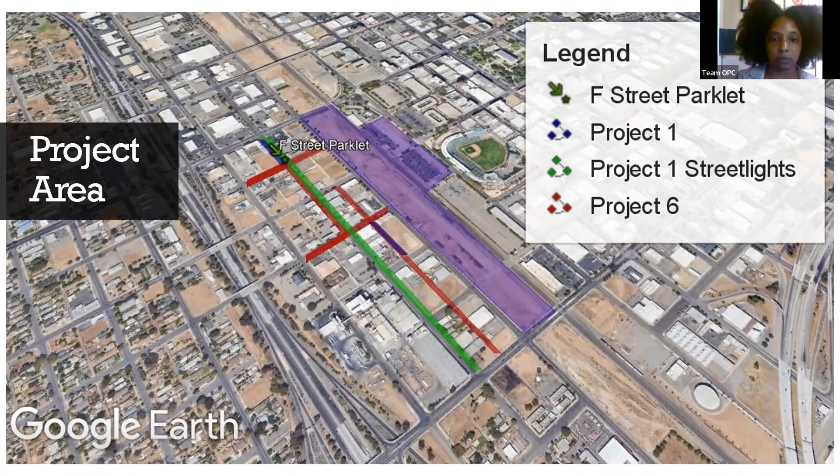This is, of course, the area at Ventura Street, as well as the corner of Ventura Street and F Street, very close to where Full Circle Brewery is. So the project will start here, essentially going along all of F Street toward Fresno Street.

This part of the project will be focused on street lighting and improved street lighting along all of F Street. There will also be some improvements along China Alley between Kern Street and Inyo at this point as well, to green up the area as well as improve safety and street lighting.

Then the project will move forward into Mariposa, corner of Mariposa and F Street, where we'll be installing a parklet. Followed by that, we'll be providing additional tree planting on that final block of F Street toward Fresno Street, between Mariposa and Fresno Street.

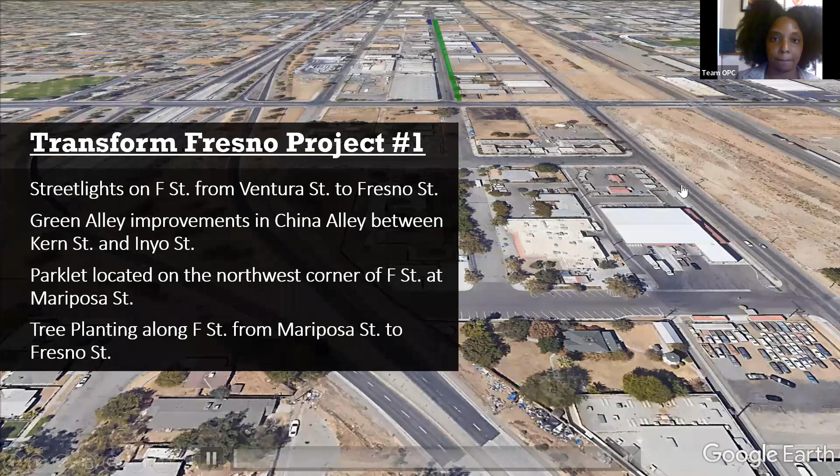The Project 6 area goes along all of China Alley that wasn't already part of Project 1, and will provide greening improvements along here as well. Then there will be additional planting and streetlight improvements and sidewalk improvements along F Street, onto Kern Street, as well as onto Mariposa.

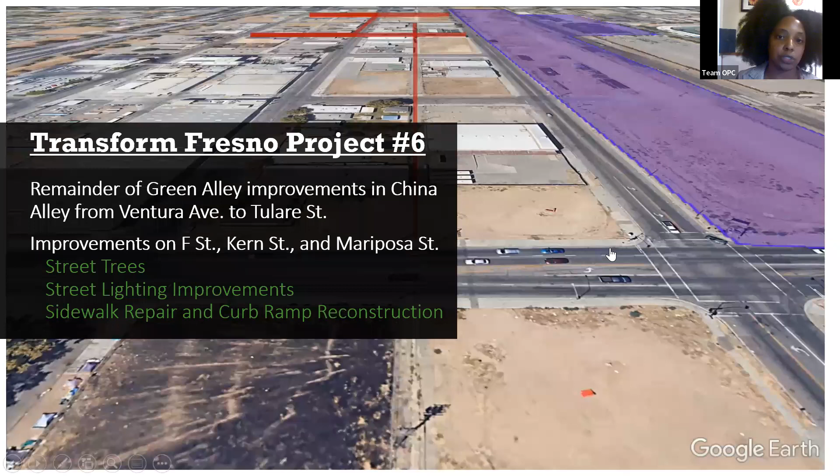Now, to go into more detail about the status of the design right now, I'm going to turn it over to Todd Wood at DeWalt. Todd?

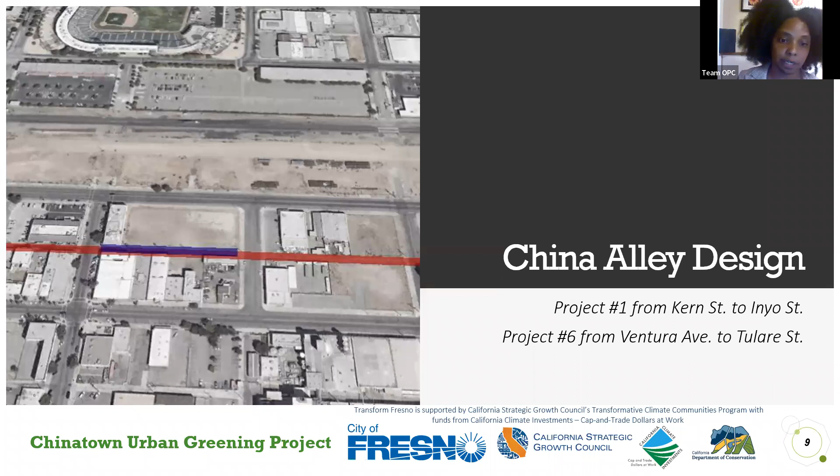Thank you, Erica. So currently, what we'd like to share with the community is that in the previous public meeting, we had a China Alley concept for the Green Alley that included multiple features, such as the Green Alley, which is the permeable pavements to accommodate local drainage. We also had a significant amount of landscape improvements that you can see kind of shaded. The concept was these landscape areas, kind of a rectangular shaded area within the alleyway.

There was a lot of feedback that we received at the last meeting that the business owners do a lot of loading and deliveries in the alleyway, so there were concerns about their delivery vehicles being able to drive safely through the alleyway. There was truck clearance issues. There was also issues associated with lighting, that the neighborhood made some concerns that while they welcomed lighting, they didn't want to attract a lot of pedestrians or people that are going to loiter in the alleyway. So safety was a big concern.

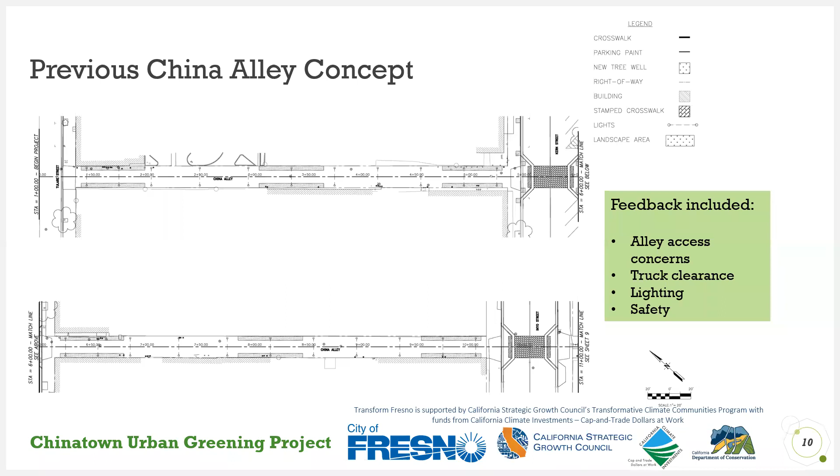So Erica, if you could go to the next slide. This may be a little bit hard to interpret exactly what's happening here, but what we've done is we've removed the landscape areas from the alleyway. So the Green Alley concept is now going to primarily focus on retaining the drainage and improving the alleyway itself with the Green Alley concept, but none of the landscaping is included in the alleyway.

So this will help preserve the existing access for the business owners and allow them to continue to utilize the alley for their deliveries and loading and unloading of their product to get to their customers. Let's go ahead and go to the next slide.

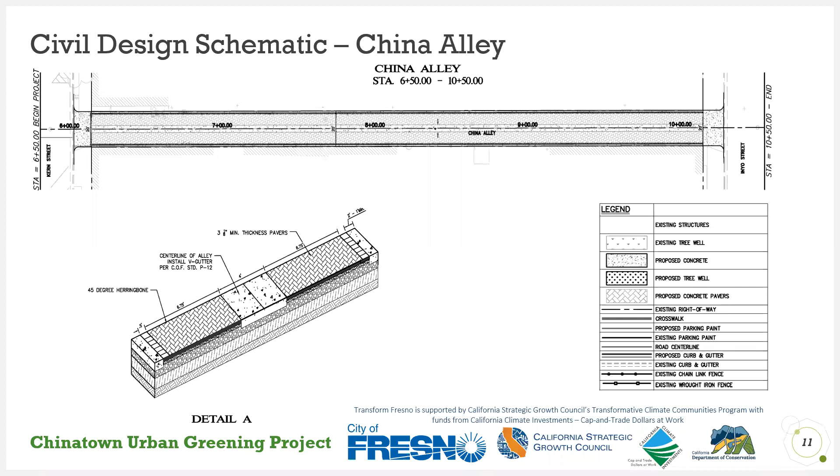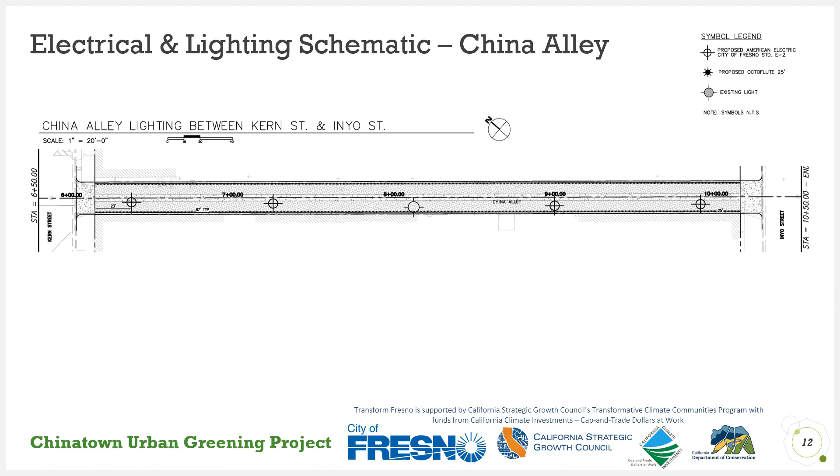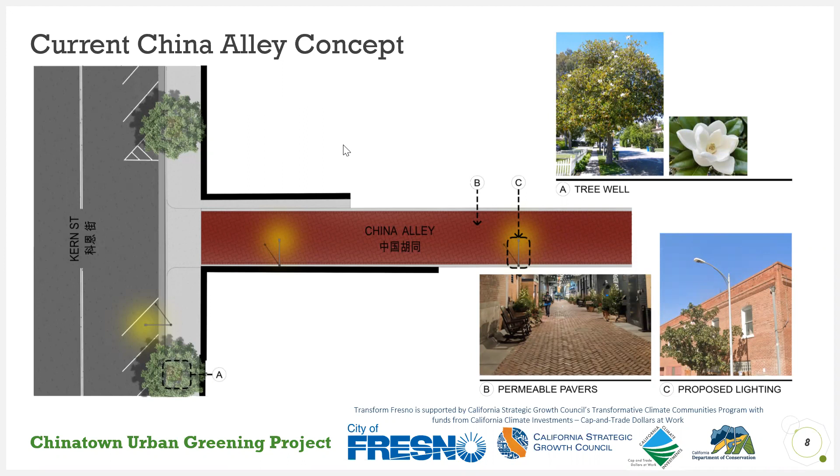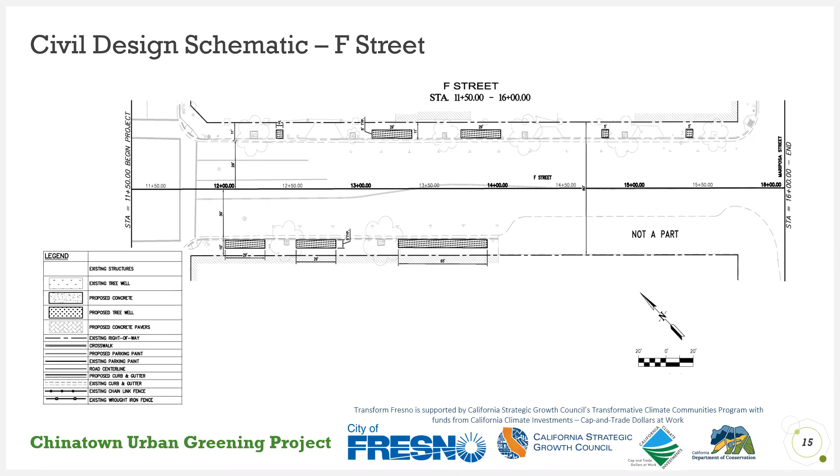Here's the electrical and lighting concept. You can see the existing lights, the larger gray centered lights. We're proposing more pedestrian friendly and landscape aesthetic lights - you'll see those symbols in a darker black symbol for the new stuff. So we're going to be adding a significant amount of lights and upgrading.

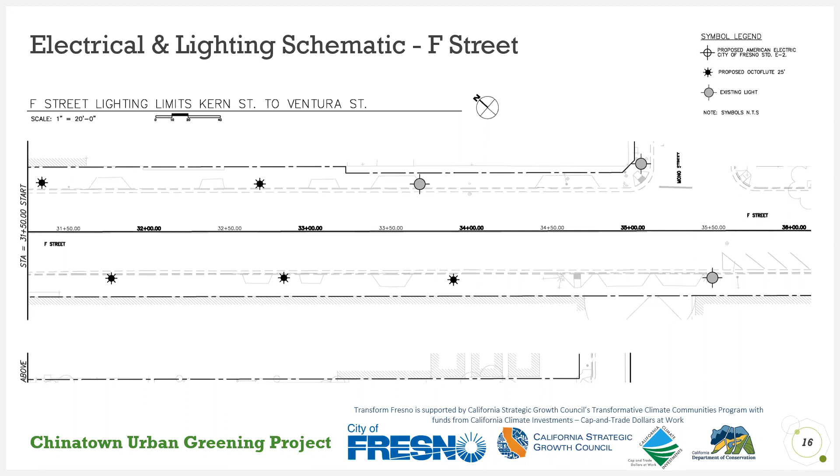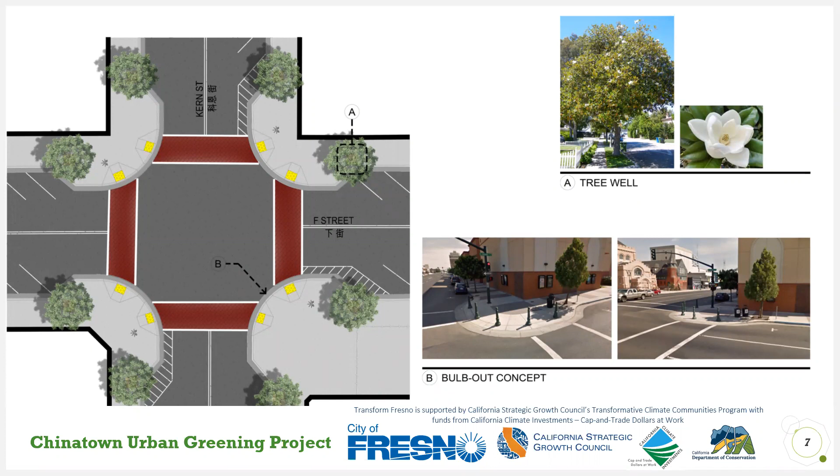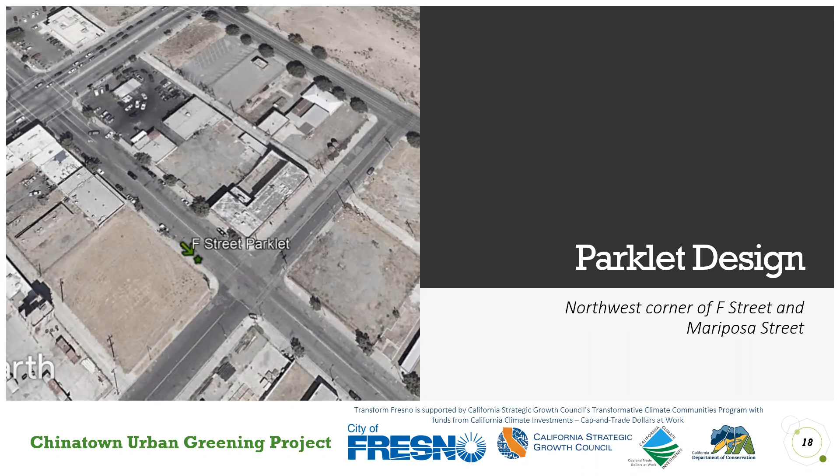Next slide, please. And I'll let Brandon take over - he can speak to the design of the parklet that'll be at the corner there on F Street.

The parklet design called out in the grant was designated for phase 1, and the preliminarily chosen location is at the northwest corner of F at Mariposa, directly across next to the Fresno Housing Authority multifamily project currently under construction. The parklet as proposed is roughly 20 foot by 8 foot wide exterior dimensions, with interior dimensions of 19 foot 8 inches by 7 feet 6 inches. It gives a nice extra space for the community to gather as they congregate down the roads, or as they're potentially visiting tenants of the building, or the potential restaurant or business owners also located in the Housing Authority project.

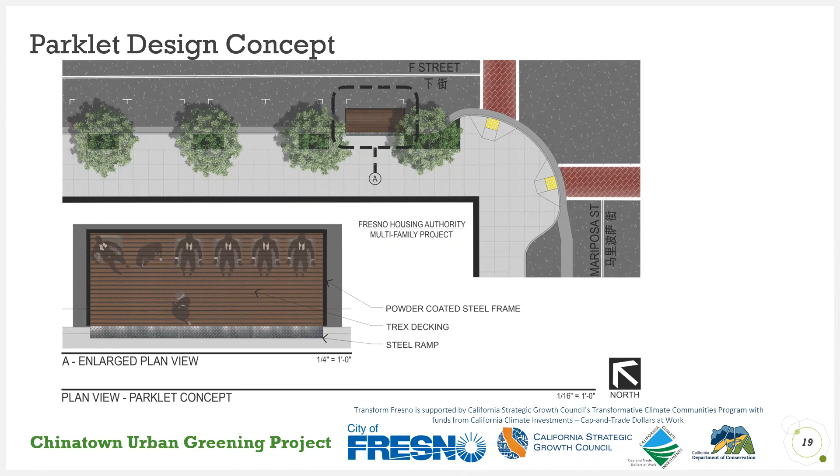The concept design is essentially a steel frame minimalistic design composed of powder coated steel tubing with stainless steel railing cables. The design attempts to detract from vandalism - the powder coating would be easily washable, so graffiti wouldn't easily adhere permanently. The decking is proposed composite wood or Trex, which is also easily cleaned with chemicals and provides a nice wood-like tactile feature, creating a bit of warmth in the urban area.

The structure itself can be forklifted away within 30 minutes to an hour and relocated at another storage facility or designated area, should the city or community decide.

There's a ramp feature that allows pedestrians as well as any ADA allowable access, ease of use. And again, it's designed to fit in one parking stall. So we hope that it's a nice addition to the community.

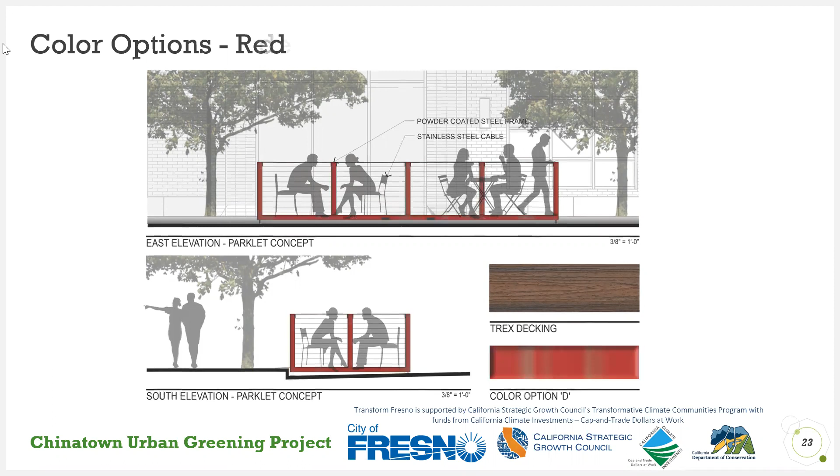So the community, you guys are welcome to go to the poll and cast your vote on which color, if any, that you guys particularly care for. And then I'm sure we'll have future feedback after that's wrapped up.

Thank you, Brandon. Yes, I've just launched a very unscientific poll to get your initial feedback and impressions on the 4 designs that we just presented. We can go back to these as well too if you guys have additional questions during the Q&A.

In addition, of course, we want to give you more than just a few seconds to look at each of these design features. Instead, we have also already put on the Transform Fresno website a survey that will ask for your feedback on these 4 color options as well. So we want to get your initial impressions just since we're all here today, but you can go to the transformfresno.com website and lodge your opinion there on which of these 4 color schemes you like the best.

Not only in terms of the colors of the parklets, but just in general, it's very important to us as the mission of this project to make sure that the community is happy with the final result. That's why my firm is engaged, and that's why we're having a meeting like this to make sure that we're able to get the community's feedback because it is very important to us.

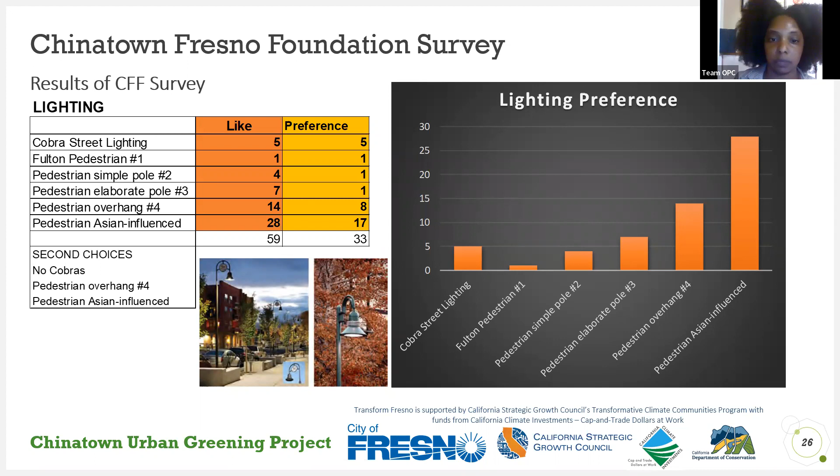So that's where we're looking right now, on the streets having some degree of decorative lighting, but then in the alleys having the Cobra lights for safety and truck clearance.

Going on from there, looking at tree selection and what might need to change in terms of the Fulton Corridor specific plan, as well as custom manufacturing of streetlights. These things are going to put a little pressure on our schedule and create a couple of minor unknowns, but the city is working through that right now.

So where we're at, again, is communication with the manufacturers, finalizing the tree selection, and of course finalizing the design features of the parklet that Brandon spoke to us about.

And again, we encourage you to give your answers in the poll or go to the Transform Fresno site and give us your opinion on which colors you like the most. That's where we currently are with the design, which means we're looking at wrapping up design roughly by the end of this year.

This is a tentative schedule. These are just estimates, and things are obviously subject to change since there are parties involved that are outside of the control of the city's engineering department. However, this is what we're shooting toward, such that we are in construction sometime in the spring of 2023.

Which means we're looking to probably have construction completed by the end of next year, so that residents and business owners and operators in the area can be planning for there being some construction during 2023. But again, these are estimates, and we never know if there might be other potential delays.

Hi, Michael, this is Brandon over at DeWalt. Yeah, we would absolutely love to do that. However, nobody has been provided anything from the Housing Authority. So if you guys have current color swatches... Sure, sure, if you ask, you shall receive.

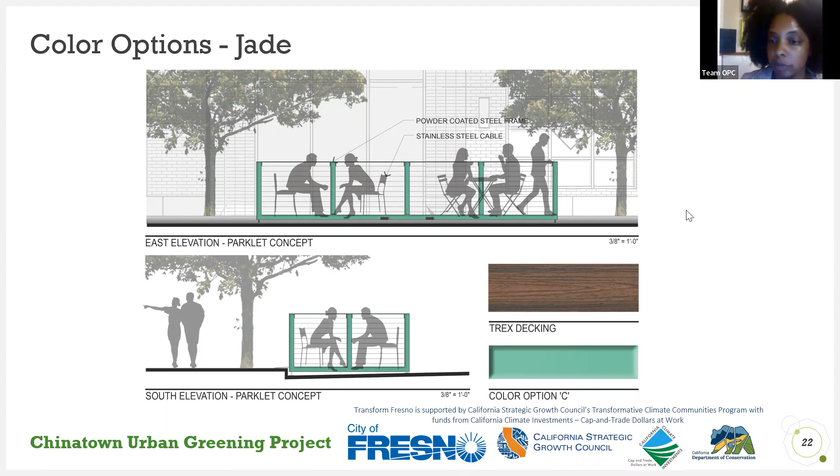So if we were to eliminate some of the trees on China Alley, the tree wells and greenery type of stuff, does that leave more in the budget to do other things? I thought bike racks was going to be part of the active transportation and sidewalks - not just fixing sidewalks, but we actually have areas in Chinatown where there are no sidewalks. So if things get moved around, does that mean there's more budget to do other things, or did we just lose out on it?

I think I can speak to moving things around, Morgan. We can't really take out trees. This is part of an urban greening project, and having as many trees as part of the project is definitely part of the goals. There are things that are not allowable as part of this project, so it depends on what you're thinking about. We have to go with what the scope says right now. There's always potential, but we need to stick with what we have put in place and what was voted on. Maybe we can talk offline and see what ideas you have.

I also have a couple more questions. Do you know which sidewalks are going to be done? And also, this is the urban greening project, but wasn't there an active transportation component in this?

Gareen, can you answer those questions? I don't know off the top of my head. This is primarily an urban greening project. It has some active transportation elements to it, but the projects we're working with, Project 1 and Project 6, are urban greening projects. We are planning to use those as much to our advantage as we can in order to fix the sidewalks near the areas we're putting in landscaping. We're going to have to run some irrigation lines in order to water the trees, and anywhere that's happening, we plan to repair the sidewalk. We're also going to be able to do the ramps for access at the intersections, but our ability to fully reconstruct sidewalk is unfortunately limited by the scope of the grant.